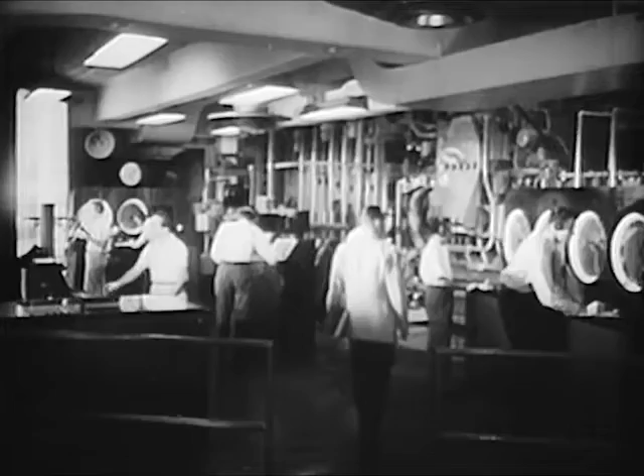Ballistics is an increasingly important and complex science that deals with the technical problems involved in hitting a given target in the field and getting the desired tactical results. Sometimes the ammunition we need to do a particular job can be carried to the target or placed in the target's path.

Sometimes it can be dropped on the target. But in most cases, it has to be fired or propelled.

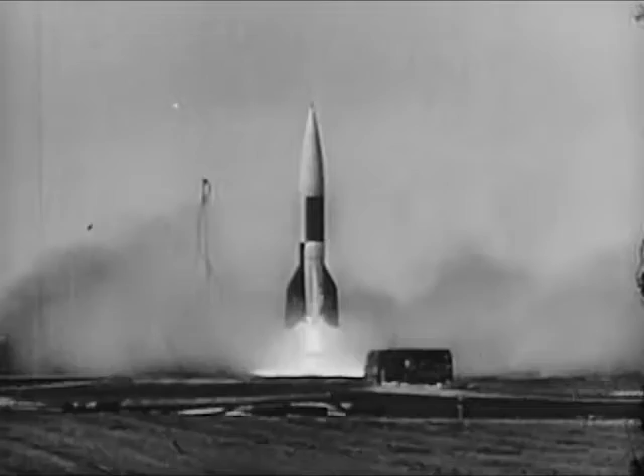This involves the solution of three different kinds of problems, covered by three closely related divisions of ballistics. Interior ballistics is concerned with the launching of the ammunition. Exterior ballistics is concerned with its behavior in flight. And terminal ballistics deals with the action of the ammunition at the target.

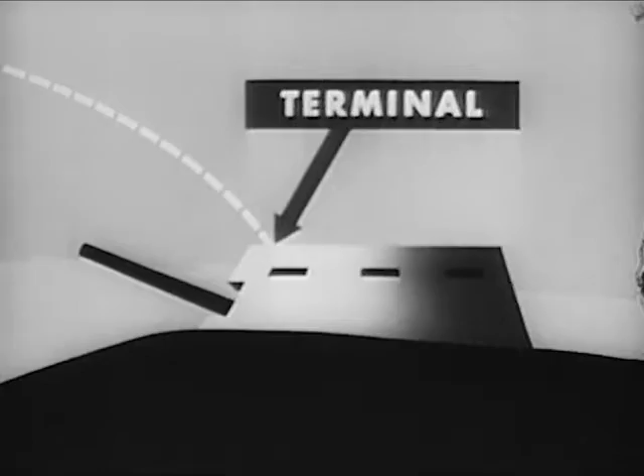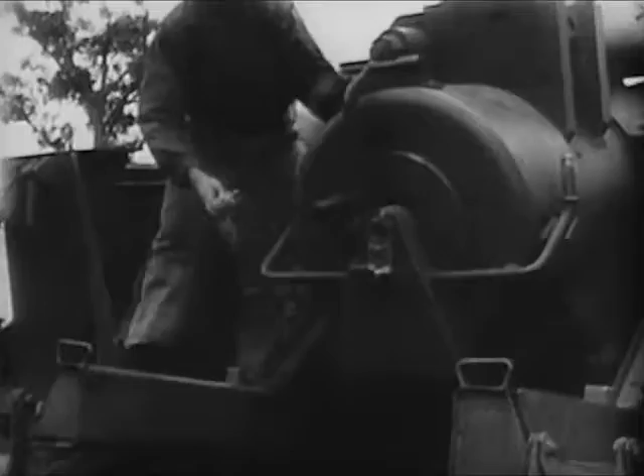Let's look first at the problems involved in launching our ammunition with launching devices that are complex, precision-made instruments, but which operate on a principle as simple as that employed in a pea shooter. When the pressure behind the projectile becomes strong enough, the projectile will move.

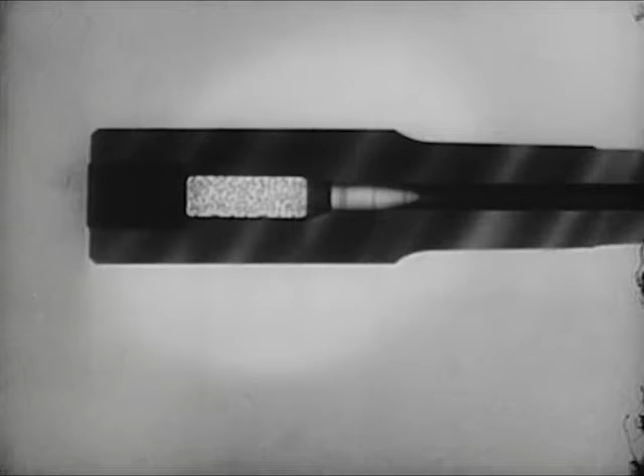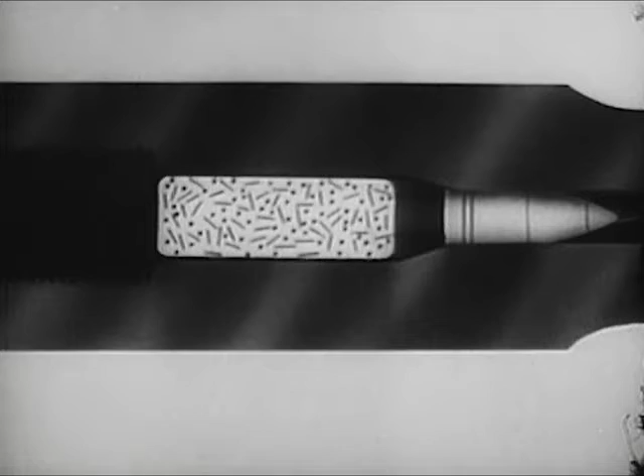In any gun, howitzer, mortar, or small arms weapon, the pressure behind the projectile is caused by the burning of the propelling charge, or propellant, which forms a tremendous amount of gas in the chamber. This pressure is measured in thousands of pounds per square inch and is exerted equally on all surrounding surfaces, but with different results.

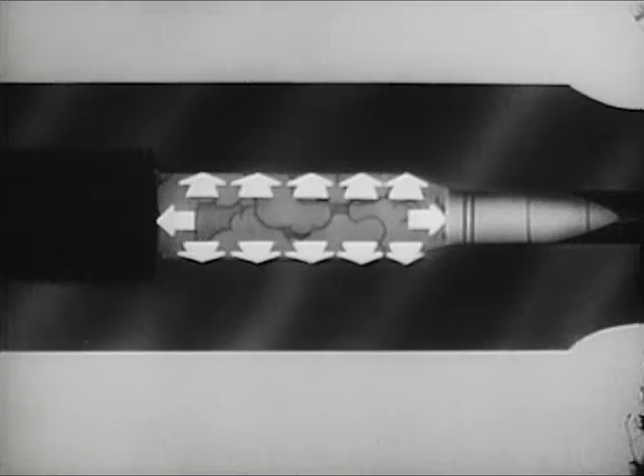The forces represented by the vertical arrows have no effect on the projectile. The pressure or force to the right is against the projectile, the most readily movable of the surrounding surfaces, and sends it out of the bore. At the same time, the force to the left is against the gun, which moves in recoil.

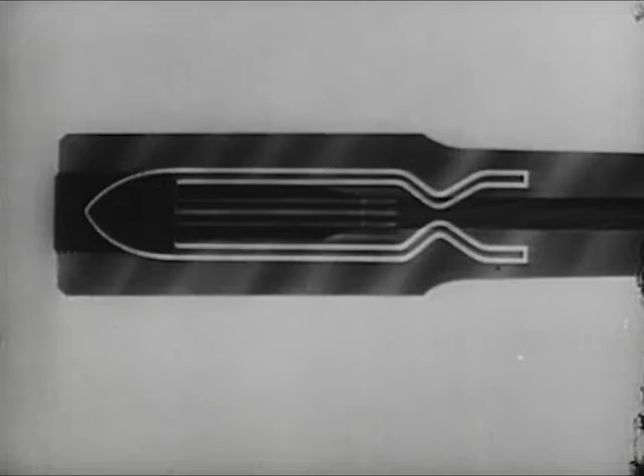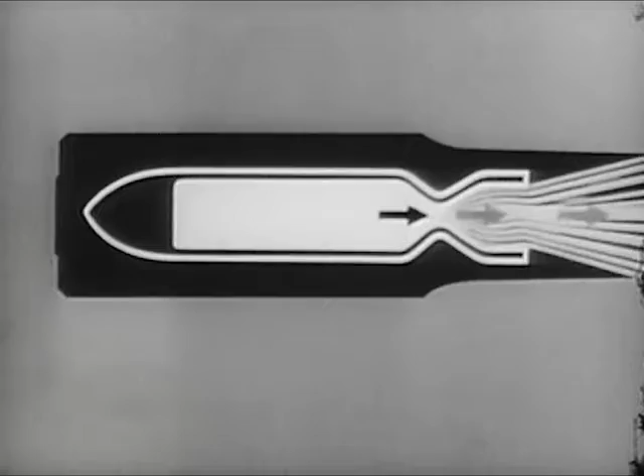By making a few changes in our simplified gun, we can see what happens when we launch a rocket. In effect, the lightweight rocket replaces the gun, and the lightweight gas replaces the projectile. The pressure inside, being equal in all directions, forces the gas out of the chamber at an extremely high velocity. At the same time, the pressure exerts an equal force to the left to propel the rocket.

Military rockets operate on exactly the same principle as the 4th of July variety. The bazooka also uses the rocket principle, while the recoilless rifle is a combination gun and rocket.

The propellant used in guns and most rockets is some form of nitrocellulose, commonly called powder. Modern powder is made in grains, the grains taking many different forms to get the various pressures needed in the many different modern weapons.

Apart from chemical composition, grain size is the most important single factor in determining how rapidly a powder charge will burn. Just as wood shavings will burn more rapidly than the same weight of logs because there's more burning surface exposed, so will small grains burn more rapidly than a large grain of the same weight.

When small, rapidly burning grains are used, the propelling effect is that of a sharp, sudden thrust. The effect we get from large grains is that of a sustained push. But grain design also affects the rate of burning.

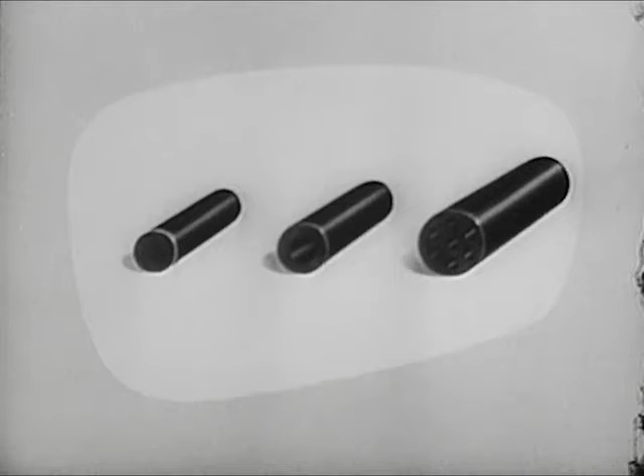In general, there are three types of grain: a large grain with 7 holes, a medium-sized grain with 1 hole, and a small solid grain called a degressive grain. When ignited inside a gun, it burns fast and the pressure rises rapidly. As the burning surface decreases, pressure is generated at a slower rate.

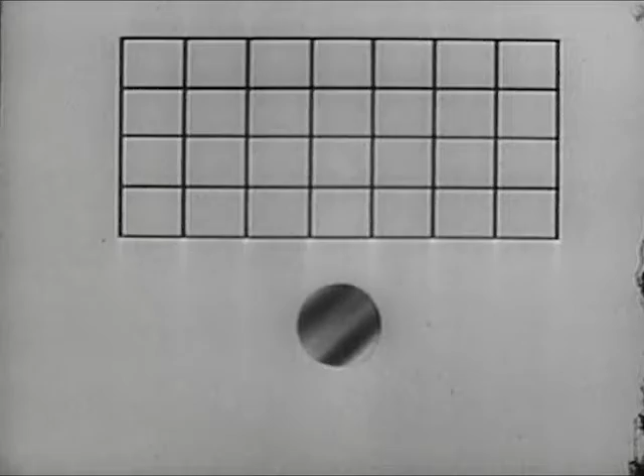Here's a graph to show pressure action during burning. The degressive grain produces a very high pressure quickly, but the movement of the projectile tends to let the pressure drop off rapidly. The medium-sized grain with a single hole is called a neutral grain.

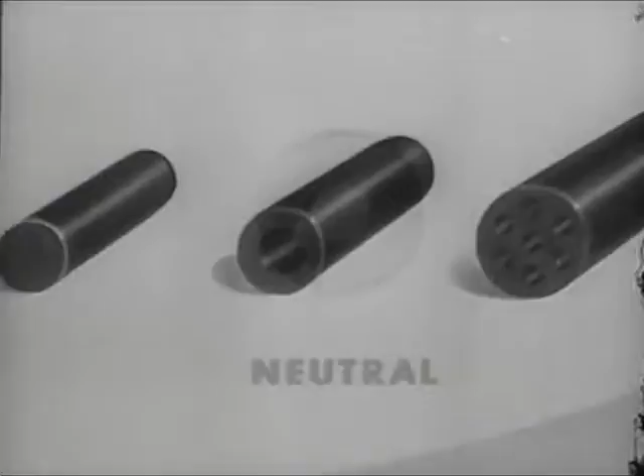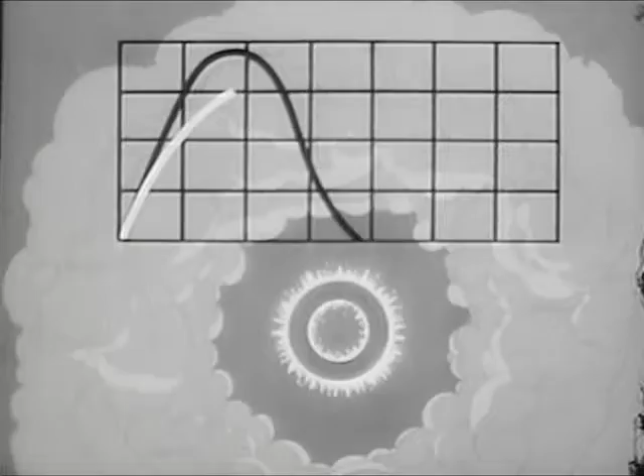In this form of grain, the burning is slower at first, but the burning surface remains constant during the burning period. Thus, the maximum pressure is not as high as with the degressive type, nor does the pressure drop off as sharply when the projectile moves.

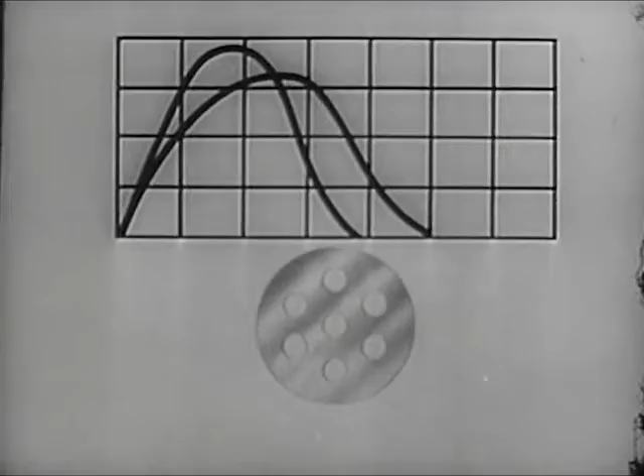The large grain with the 7 lengthwise holes is called a progressive grain. Here, the burning surface increases due to the number of holes. The pressure produced is not as high as with the others, but it falls off even less rapidly as the projectile moves. This grain is preferred in modern high-velocity weapons because it gives the projectile a steady push, produces higher muzzle velocities, and has a lower maximum pressure than is possible with other types of grains.

There are many other grain designs, the fast-burning powder sheets for mortars, for example.

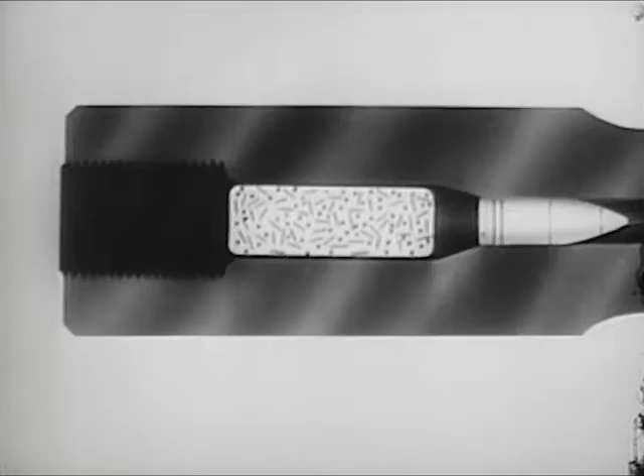Neutral tube-shaped grains are used for certain types of rockets, as well as a variety of other kinds, each designed to provide the particular burning characteristics best suited to the weapon concerned. Now let's see what kind of pressure action we need for different guns.

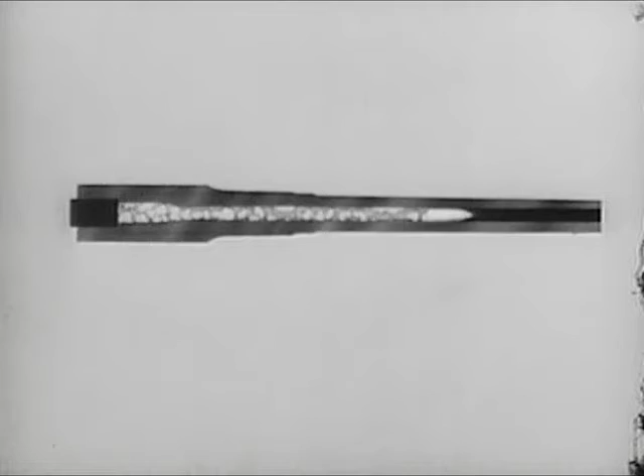When we burn a suitable charge of progressive grains, the pressure is moderate and sustained, sending the projectile out of the bore with a continuous push. This kind of pressure action is just what we need to get high velocity in long-barreled artillery.

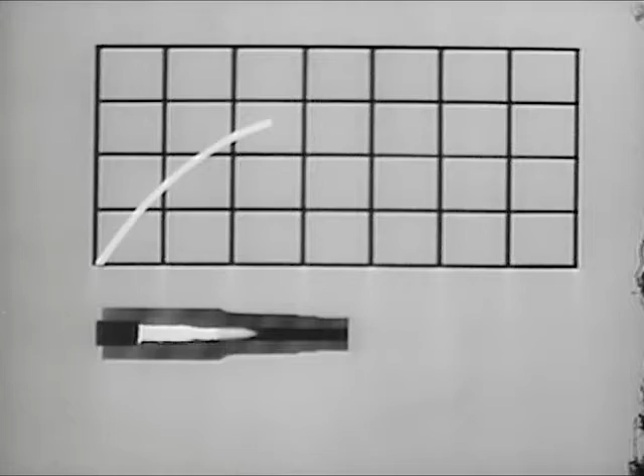But now we'll see what happens when we use the same charge in a short-barreled weapon. There's considerable muzzle flash, and the powder continues burning even after the projectile has left the bore, indicating that energy is being wasted. For a short-barreled weapon, a small digressive grain should be used. This builds up maximum pressure quickly to accelerate the projectile in a short space without undue burning afterward. This kind of pressure action is just what we want for low-velocity weapons, such as mortars or pistols.

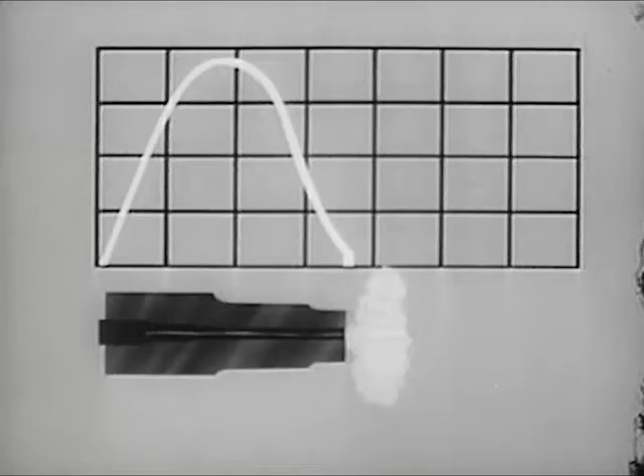But if we use digressive grains in a long-barreled gun, there's a chance that the higher maximum pressure produced will blow it up.

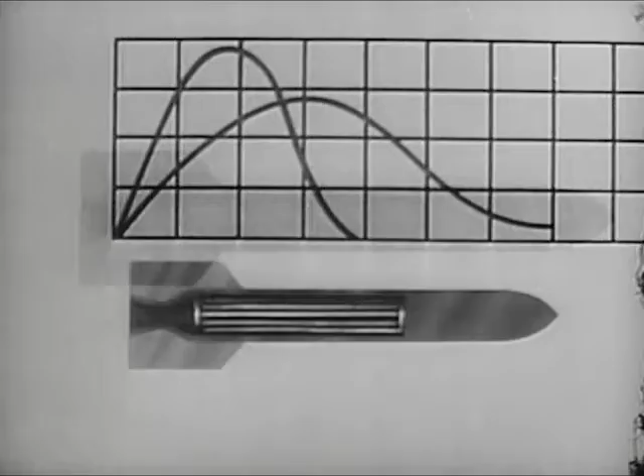For a rocket, we need a low, steady pressure, so we use a special neutral grain. The low pressure will not burst the lightweight rocket, yet give smooth acceleration.

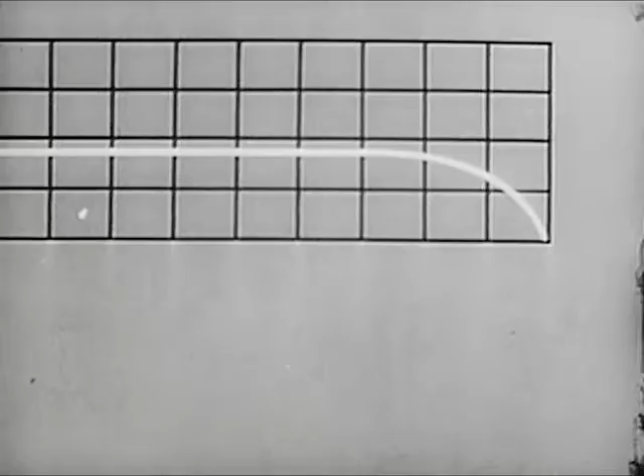For the V-2 and other large rockets, it's better to use certain liquid propellants, mixing them at a constant rate to assure constant burning.

In all cases, the propellant must suit a particular tactical purpose. That means providing the desired velocity with a minimum of smoke, flash, and wear on the weapon.

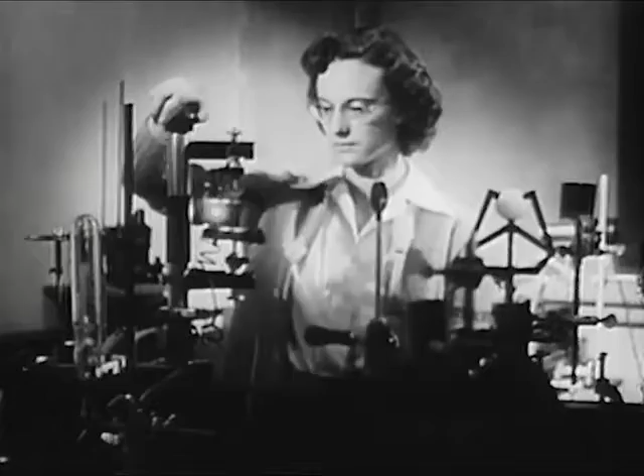Interior ballistics is a highly complicated science, and what you've seen isn't the whole story by any means. But you do know what an important part pressure plays in launching the projectiles. You know something of the effects of grain size and design on gas pressure, and you know the relative burning action of the degressive and other types of grain.

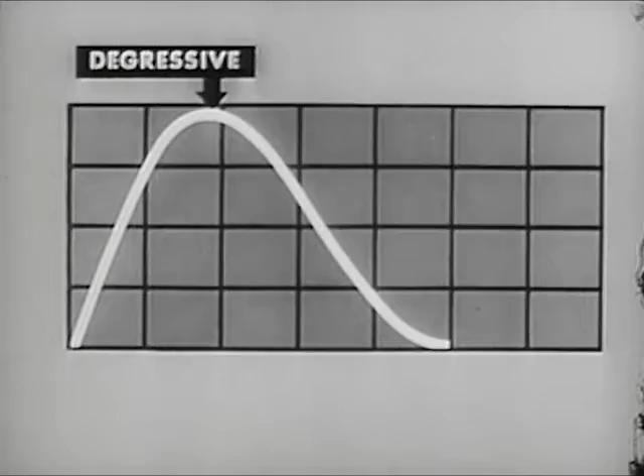In other words, you've got a good idea of why and how a projectile leaves home. Now you're ready to consider exterior ballistics, which is concerned with the behavior of projectiles in flight.

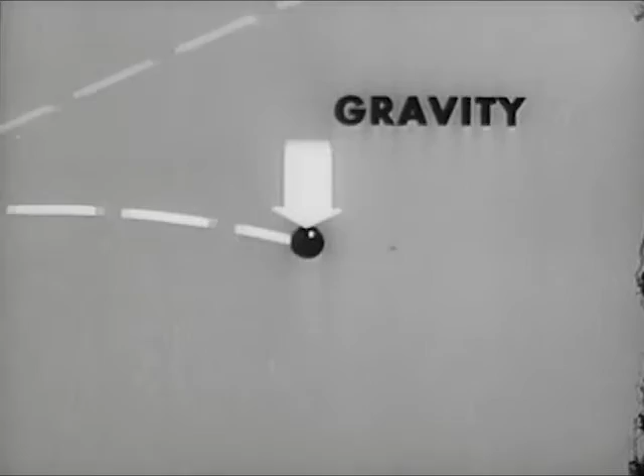If we could fire a cannonball influenced by no outside forces, it would continue forever in its original direction at its original velocity. If we add the force of gravity, the cannonball follows this sort of path, or trajectory. By adding air resistance, we get this result, and the range is shortened still more.

We need something to stabilize our projectile in flight. One solution is to equip the projectile with fins. The use of fins solves the problem very effectively for mortars and some types of rockets, and the result is much greater range. Having the projectile spin is another solution to the tumbling problem.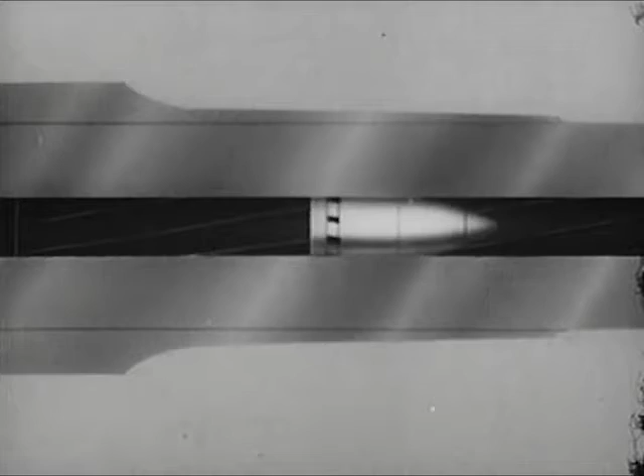This, however, causes the projectile to swerve from a straight course, drifting to one side according to the direction of the spin. That isn't as bad as it might seem, because we know it's going to happen, and we allow for the drift in aiming.

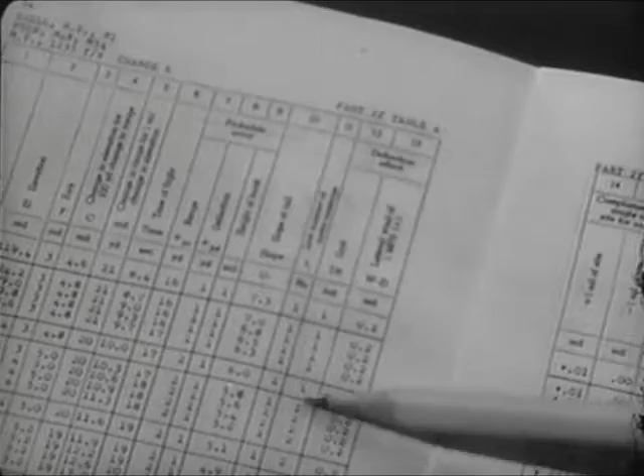To get the required spin, spiral grooves are cut in the bore of the gun and a soft rotating band put around the projectile. The band engages the grooves and the projectile rotates, or spins.

Although there are many forces affecting the projectile, the most important to remember are gravity, which pulls the projectile down, and drag due to air resistance, which slows the projectile. There's nothing we can do about gravity, but we can overcome the effects of drag to some extent in the design of our projectiles - for instance, by the streamlined windshield on this one.

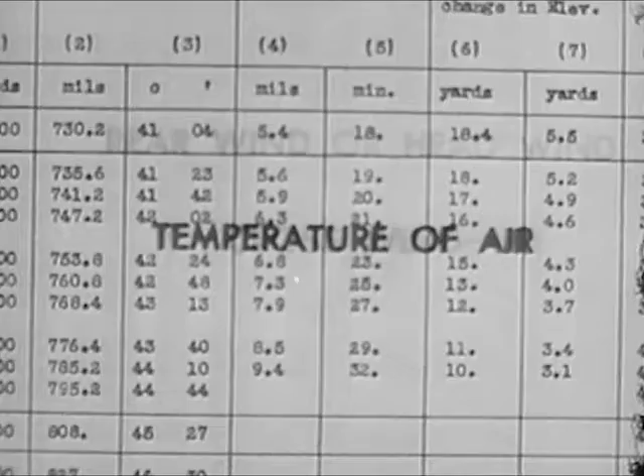Boat tailing, another method of streamlining, also helps to reduce drag. For long-range fire, we must consider, in addition to gravity and drag, the effects of varying density of the air, the temperature of the air, winds over the trajectory, and the rotation of the Earth.

The basic problem of the exterior ballistician is always the same: to study, improve, and predict the behavior of projectiles or missiles in flight.

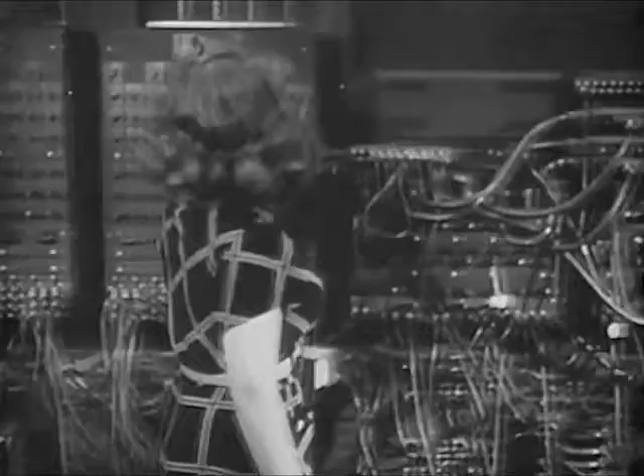Solution of the problem involves the knowledge of many complex forces, the application of many scientific principles, the use of many ingenious lightning-fast computing machines. The ultimate purpose of all this is to design projectiles and compute firing tables, both of such accuracy that our combat units get the maximum number of direct hits.

And that is where terminal ballistics comes in. In terminal ballistics, we are concerned with what happens at the target, with the problem of getting the type of action we want for each different kind of target by the most economical, practicable means.

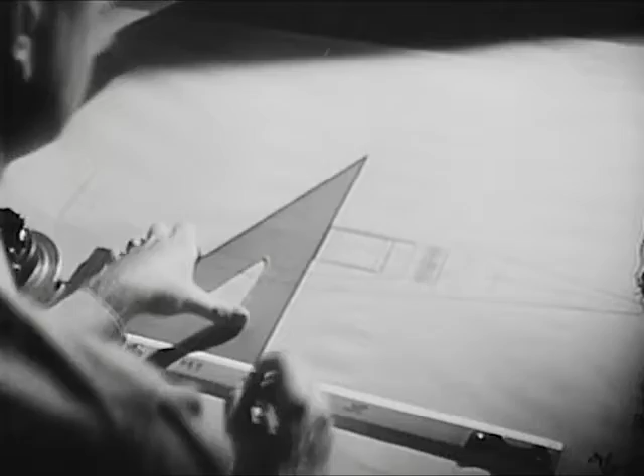Our projectiles, bombs, warheads, mines, grenades, and so forth are designed to provide different basic effects. By using a large amount of high explosive, we get an effect called blast, making use of violently expanding gases under tremendous pressure. Blast shatters brittle masonry or concrete.

It will also twist and tear the metal construction of buildings and vehicles. If penetration is the important thing, we can use a high-velocity projectile with a tough nose and little or no explosive. This sort of projectile will penetrate wood, stone, and up to several inches of steel.

By using certain proportions between the weight of the explosive and the thickness of the projectile, we can get fragmentation. Our projectile or bomb breaks up into hundreds of flying fragments. They penetrate like bullets, but leave more jagged, irregular holes. Fragments from bursting shells can do severe damage to personnel and to light structures, such as this plane.

Finally, by using incendiary projectiles or bomb clusters, we can start fires to cause great damage in a city or in a structure or area where large quantities of supplies are stored. Generally speaking, each type of action will be effective against one particular type of target, but a combination will be even more effective. So our projectiles and bombs are usually designed with such a combination in mind.

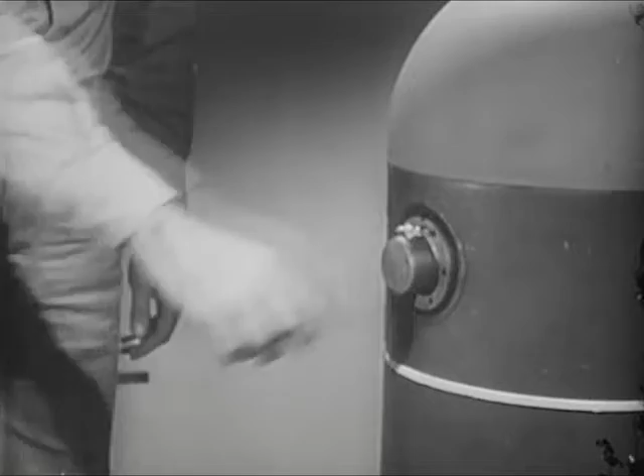Fuse location is also important. In certain cases, we'll get the best results by placing the fuse at the front end of the projectile. In other cases, it works better in the base. Bomb fuses are sometimes placed on the side, and in the larger bombs, more than one fuse is necessary. The fuse type and fuse location determine to a large extent the type of action we get at the target.

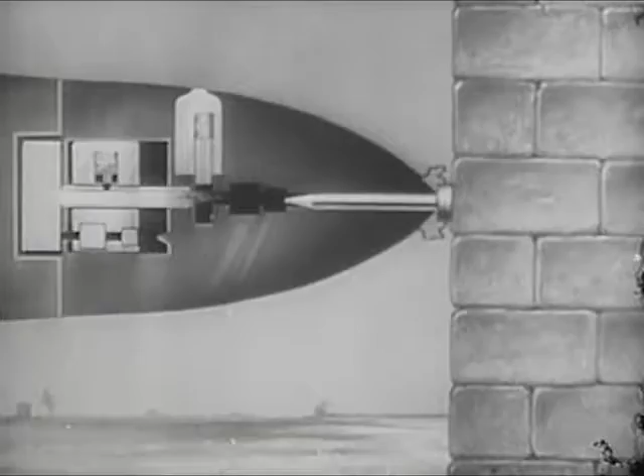Now let's consider a typical application of these fundamentals of terminal ballistics in dealing with an enemy plane. Fragmentation is the effect we want. Besides endangering personnel in the plane, flying fragments can wreck the engines, weaken structural members, and may penetrate the fuel tanks, generating enough heat to start a fire.

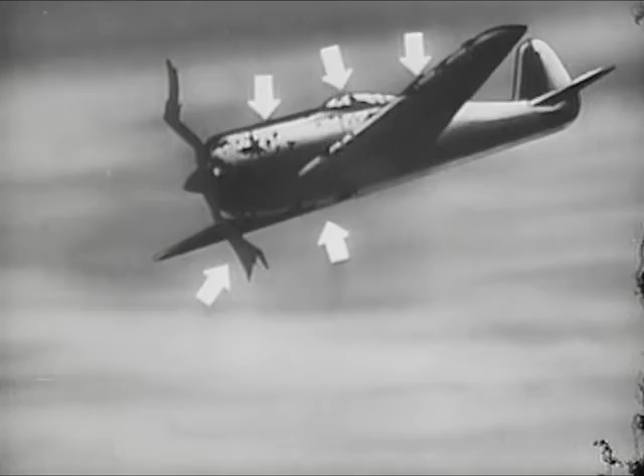The shell to do this particular job must carry enough high explosive to shatter the shell case and produce high-velocity fragments of the most effective size. Now, what about the fuse for this job? We might use a time fuse, but our best bet will be a fuse of the proximity type, one that will go off automatically when it's near the target.

If we're dealing with an armored target or one of reinforced concrete, the first problem is to penetrate. So we need a tough-nosed, armor-piercing projectile that will be strong enough to withstand impact, one that will penetrate without breaking up.

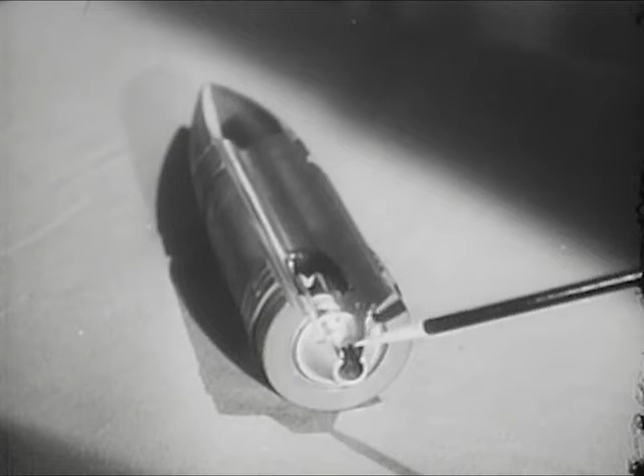Fragmentation is effective after penetration, so a small explosive charge is added. In this case, the fuse must be placed in the base of the projectile and should have a short delay action after impact. The combined effect of penetration and fragmentation gets both the pillbox and its occupant.

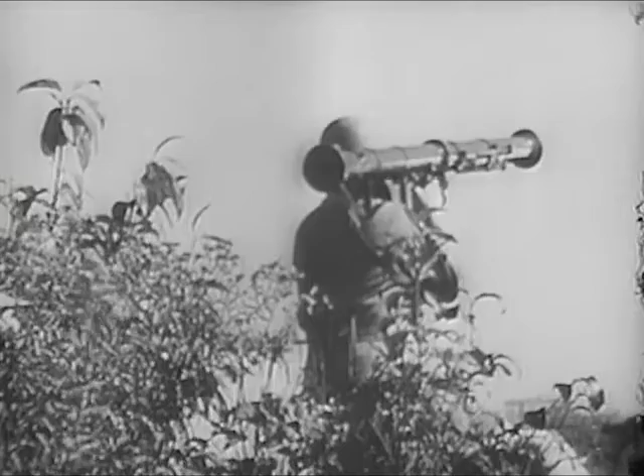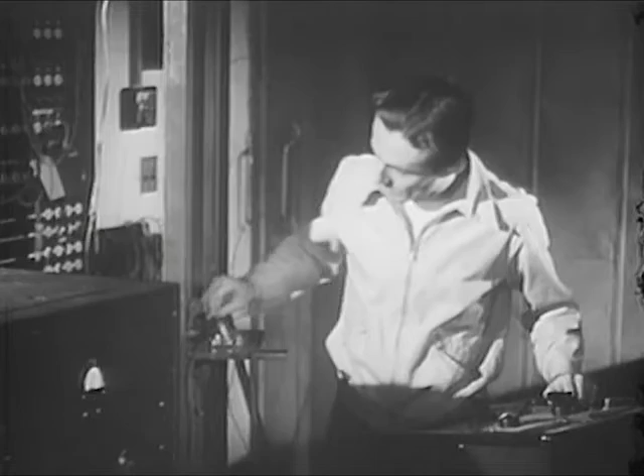If we don't have high velocity, we can get penetration by sharply focusing the force of the explosion. This is done by the proper shaping of the high explosive charge. It's up to the terminal ballistician to determine from his experience and his experiments which combination of effects will be the most destructive for each kind of target.

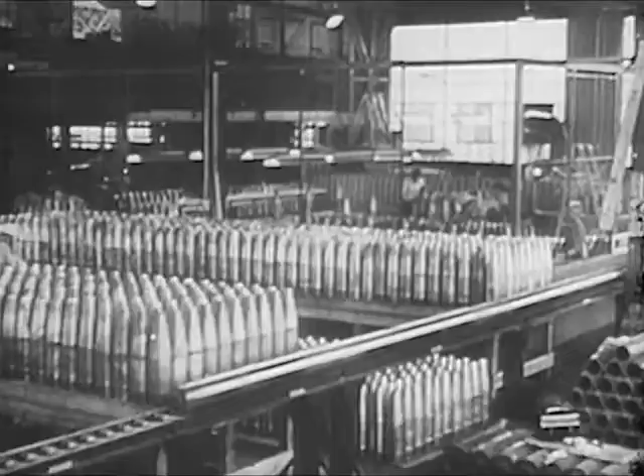And there are other elements to be considered by the terminal ballistician. In all cases, the ammunition he prescribes must be suitable for mass production. It must also be safe to handle, transport, and store. Technically, it must present no impossible problems in any phase of ballistics.

The first concern of the interior ballistician is the safe and successful launching of the ammunition. The important point to the exterior ballistician is predicting its behavior in flight. By means of firing tables, this information is passed on to the appropriate using units. They, in turn, must launch the ammunition with full confidence that the terminal ballistician has provided it with the proper destructive potentialities at the target.